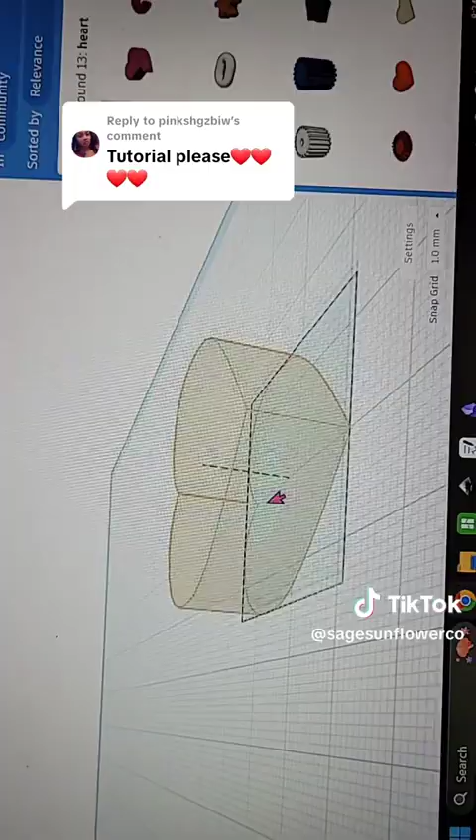Most straw toppers are maybe 15 or 14 millimeters. I just use 14, so you're going to hit that button in the middle, which changes the height to 14. See how it got a little bigger.

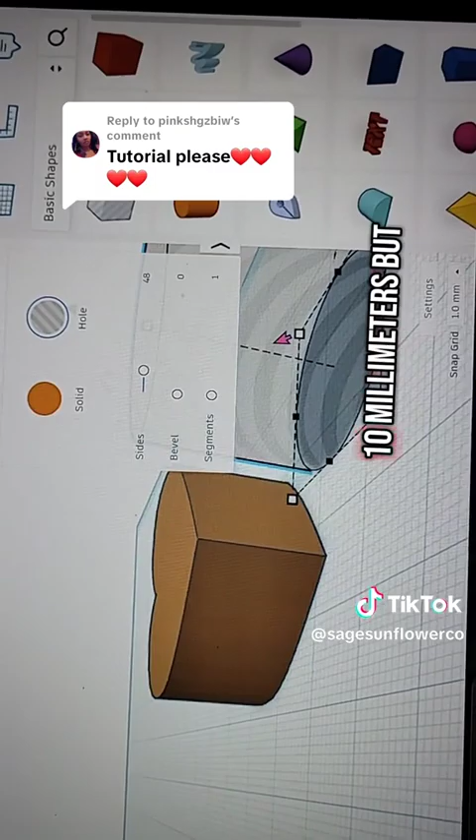What we also need to do is make sure we have the section for our hole. So we're going to go out of this and do the cylinder, because that's where the straw is going to go. Certain straws have different sizes — if you're using straws for Stanley cups, those are usually like 10 millimeters, but some of the regular ones are 8. For this one, we're going to do 10, so we have to make sure we're putting it at the right size.

What I'm going to do is make it taller because it's going to have to go from one end of the heart to the other, so you'll have a full straw topper. Again, the middle changes the height to go up and down.

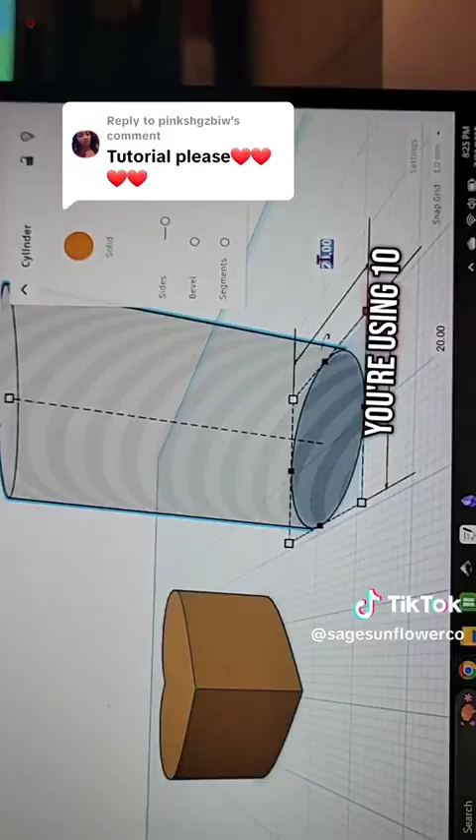Now this part, you have to make sure you're using 10 on each side, because I have done it where I did 10 and the other one was like 9 point something, and it gives you an error when you go to slice it in your slicer. So just make sure it's an even circle — you can check by looking at the corners of the dimension of the cylinder. I always put my snap grid on 0 just so I have a little bit more control over it.

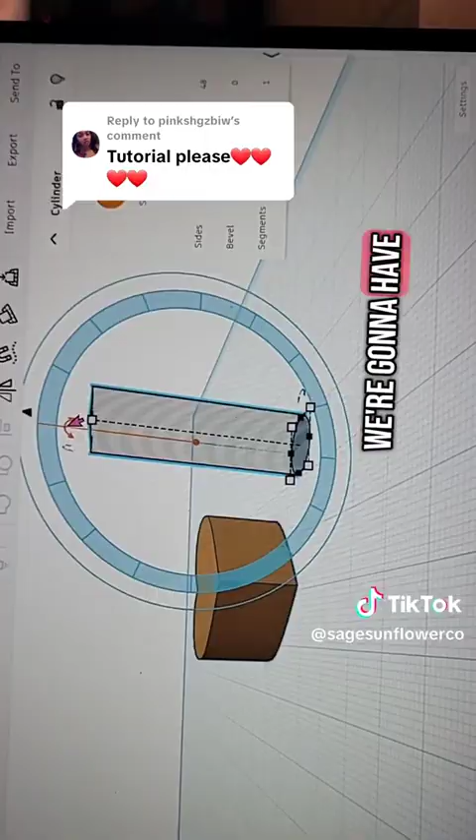Now we're going to have to rotate it. There's a little button at the top, and sometimes it's hard to find, but you want to rotate it back so it's flat. Now you see that it's kind of just sitting in the air — we want it flat to the artboard. So you can either hit D and it'll flatten it down, or you can just hit that button over there. Click it, and you see it went back to the board.

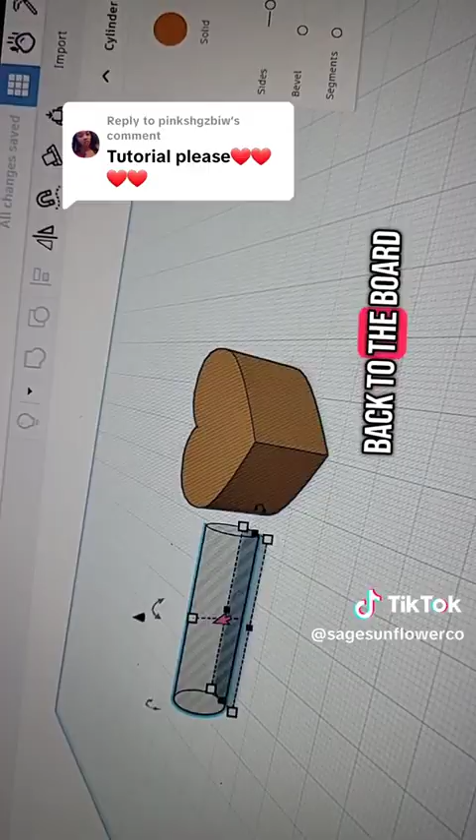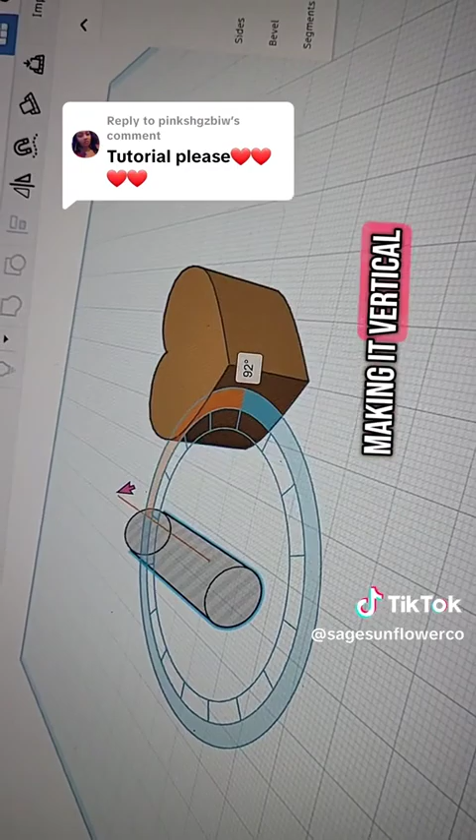Now we're going to have to rotate it again because we want the straw hole to be at the top part of the heart and ending on the bottom part of the heart. You can see there are 3 different arrows — one at the top, one on the left, and one on the right — so you just have to pay attention to which direction it's telling you it can go. We want to make it vertical, so now we have it vertical, and we're just going to change the degrees to 90 so we have it nice and even.

You have to be careful when you're moving it over because it will change the shape. Make sure you're just dragging it, not from any of those black points on the end, or some of the white points on the end. That way you're making sure you're dragging it the correct way.

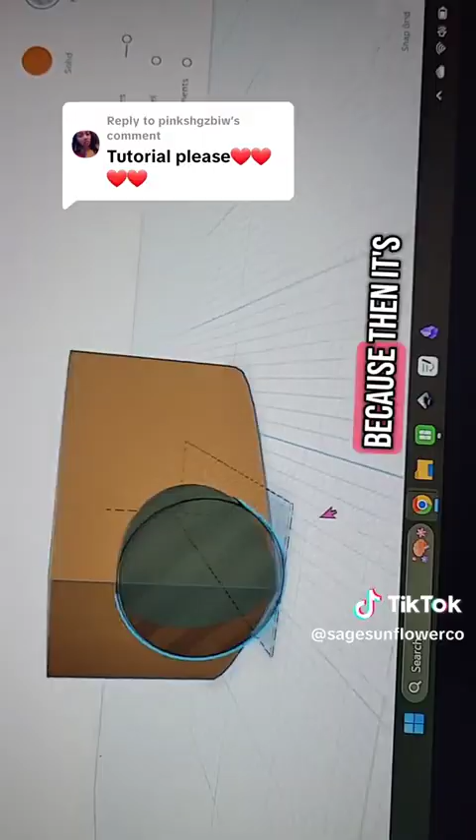Now you see how it's flush with the straw topper. You don't want it that flat because then it's not going to print right. It'll probably give you an error too.

So we're going to have to move this up and we need to center this. The hole needs to be centered with the middle of the heart topper. You do this by hitting the control key and then pushing your arrow key up, and then you can kind of eyeball measure it.

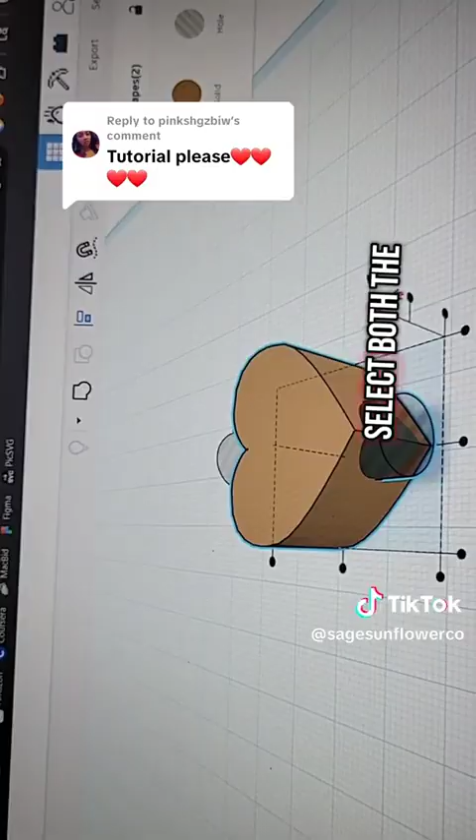But there's also a button up there that's how you can align it. So if you select both the hole and the heart, and then select the middle button on the side, and also the middle button on the right side and then the left side, and then do the one that's in the middle, that way they're all aligned. If they're not highlighted, like see how it's grayed out, that means they're aligned. So it's aligned in the middle, on the side, and on the front side of it too.

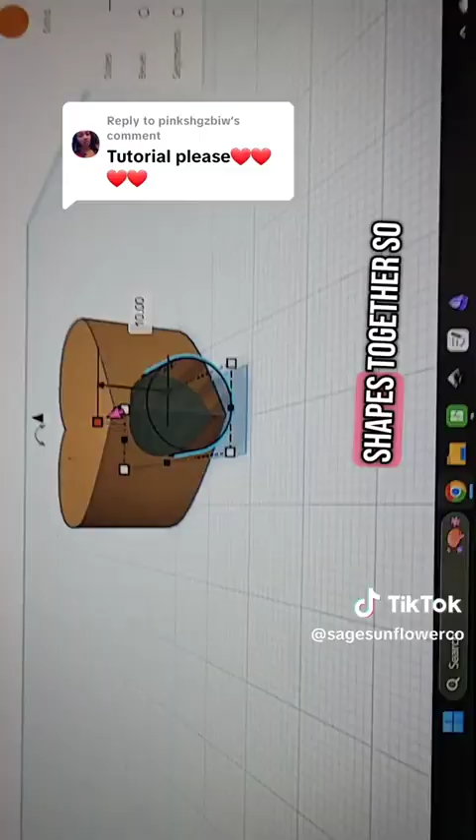Now you're going to group the shapes together so it can become one piece. Select both the heart and the hole, and then press the button at the top. This will group everything together. When it's showing a red line, that means it's thinking, and once the red line's gone away, it's now one shape.

So you can see the hole is straight through the middle. There's no overlapping or gapping, anything like that. And then with your shape selected, you're going to hit export, and export it as an STL.

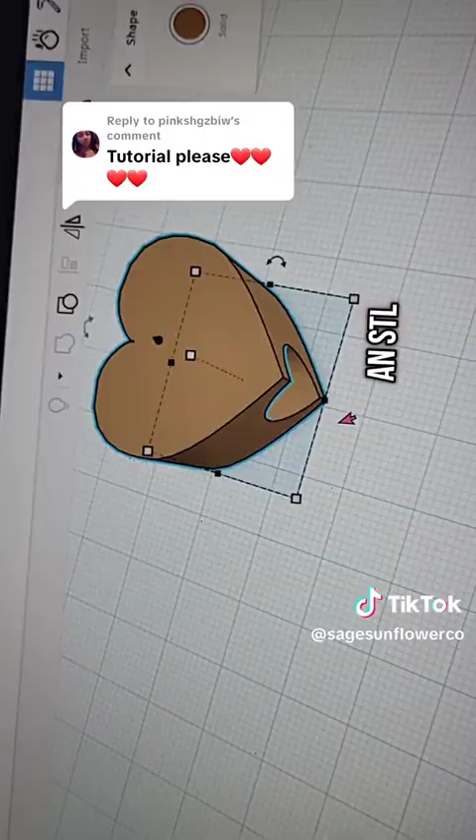Then if you have Bambu Studio, which is what I have, you're going to import it there. Just save it, whatever name. Now you're going to open up Bambu Studio and do new project, that way you can add the heart that we just did. Click the first button that says add, and find your file. It should be an STL that you created in Tinkercad.

One thing I forgot to do was make it bigger. Most of the time, for straw toppers, they're usually about 43 to about 45 millimeters, either side one way, doesn't matter. As long as one side of it is 43, it'll scale to whatever it needs to be.

So I'm just manually moving this one up to make it a little bigger. I think I did about 45 to 42 millimeters. And then you're going to hit slice, and it should say slice okay.

If you get an error saying something about needing tree supports or some type of supports, it's probably because the hole wasn't fully developed on there. Remember I was talking about how if you did like 10 millimeters and you were off on one side of the hole, then it'll give you that error.

And then you can just go through and hit print, and whatever color you want it to be. And then that's it, so you can get a little bit of practice on how to do it.